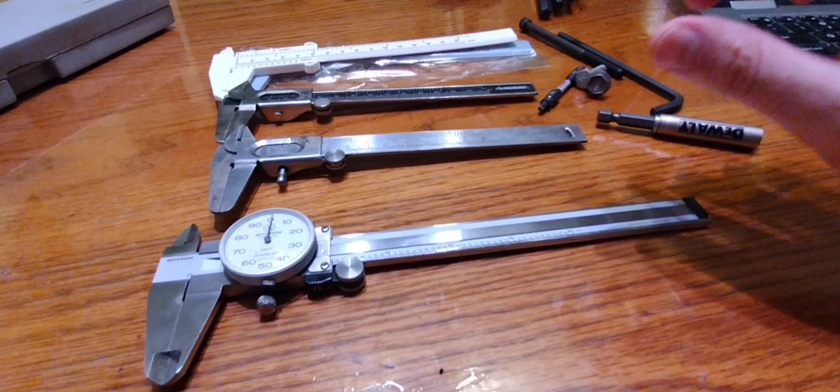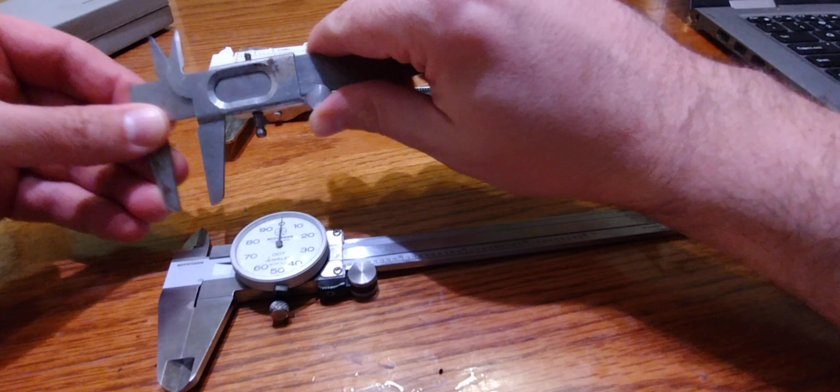So we've got several. I have no digital calipers. I have these Mitutoyo ones, which I don't know how much they'd cost new, but they cost me $50 used, bought from a widow of a machinist—obviously her husband's, who's the machinist. I mean, not that housewives of machinists couldn't have their own calipers. But anyway, this is an Empire one.

So these are all vernier scale ones, and I'll talk about these lines and what they mean. This is an Empire brand I bought at Home Depot. This is a Husky one, and I actually ended up liking this one a little better because it was more readable, even though I think this one might be made in America. And obviously this isn't the store brand, so it's a little better quality.

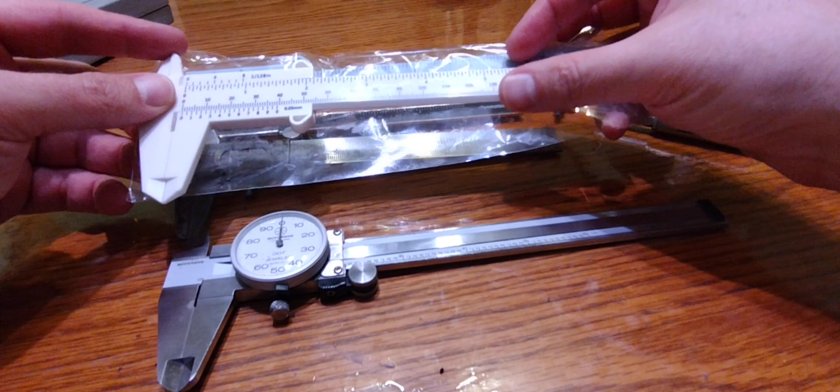I don't think much of that. And then I got these plastic ones. The story behind these is basically my wife, who's a physical therapist, a doctor of physical therapy, needed to do some kind of therapy that involved calipers, and she's like, 'Hey, do you have calipers?' Because that's like a thing you'd have—well, you've seen my YouTube channel, and she lives with me. I'm like, 'Do you need good ones or cheap ones?' And she's like, 'Oh, I need cheap ones.' Long story short, I said I'd just get her the plastic ones since they were going on human flesh. I went on Amazon to look for them, and when you get the plastic ones, they're so cheap you can't just buy one—you have to buy 10 or 7 or whatever, so I just got the big pack.

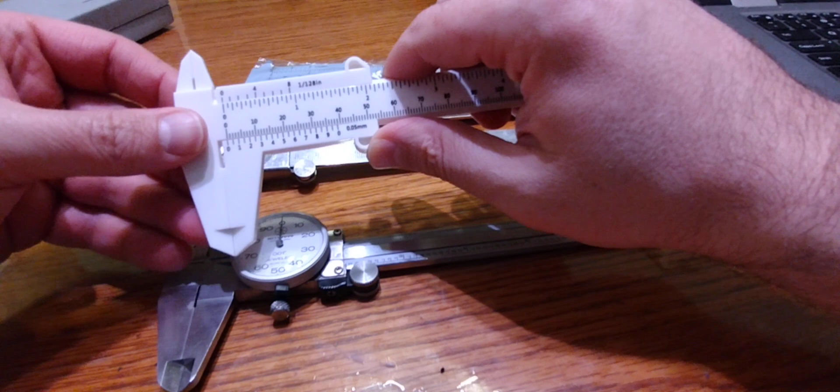So with all these calipers, one thing I was amazed about, and what I'm really going to talk about before I go into calibrating stuff, is that the main reason I got this one was that all these other calipers measure up to 1/128th of an inch, while this one goes to 1/1000th of an inch. But the main reason I got it was just because of this big dial, because I don't have the eyes anymore—I do not have the eyes to read a vernier scale.

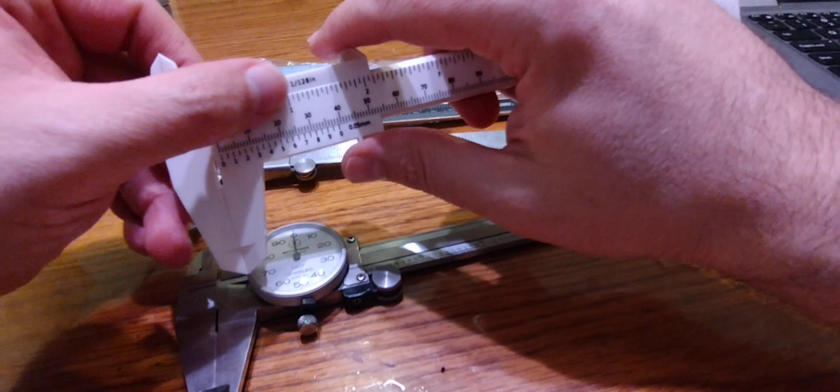But then I discovered when I got this one, maybe at first I thought it was just the contrast, but I can actually read all these lines here. And the thing with the vernier scale is, let's actually try to take a little measurement here so we can demonstrate this. Okay, I can actually read it through the camera too.

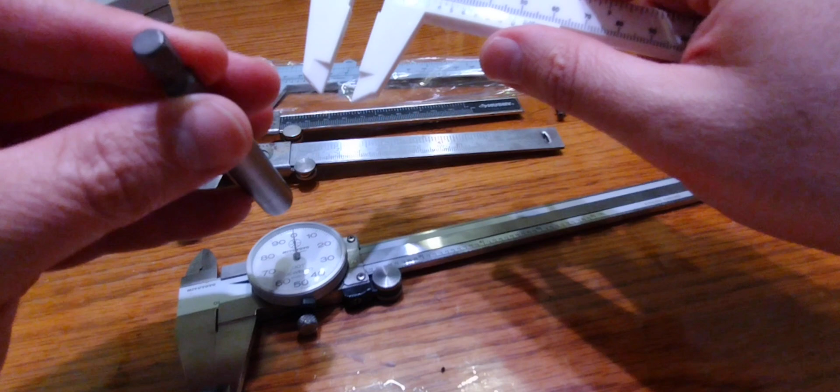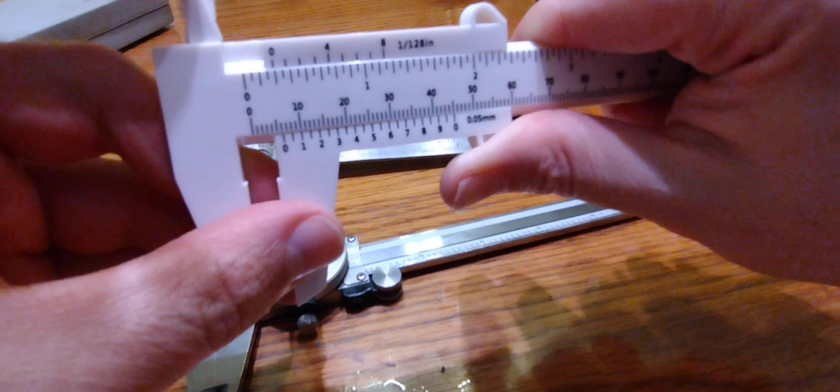Okay, so these are nominally quarter-inch hexagons—across the flats, these are nominally a quarter-inch. So let's take the measurement here in the middle. What you're supposed to do is see which of these lines actually lines up—we know it's a quarter-inch, but that zero doesn't perfectly line up with the quarter-inch mark. We have to see which of these lines actually lines up perfectly, and I think it's the 4. Those are in 128ths of an inch, so you add that many 128ths to it.

Right, so let's see—I'm going to say 4 or 5. No, I'm going to say 5 is close. No, I'm going to say 6. Yeah, I'm going to actually say 6. Okay, so 6/128ths is spot on.

Okay, so that's 1/4 plus 6/128ths. Let me use the scientific calculator. 1 divided by 4 plus 6 divided by 128 equals 0.297, so 0.296875. Okay, let's check this with the better instrument.

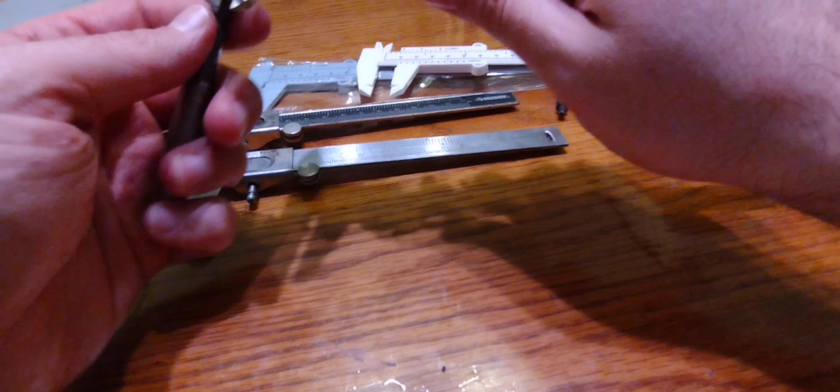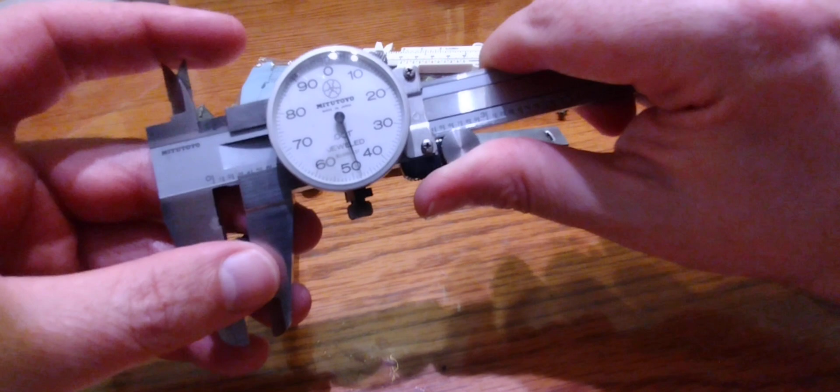Now, I don't have the means to calibrate these or test these with gauge blocks or a standard calibration standard, which you'd use for a micrometer that goes down to hundred-thousandths or mils. Okay, anyway, so this is...

0.247. This is 0.247. So 0.247. Okay, I don't know how accurate that is. Anyway, we're going to do some more—let's figure this one out. So we said that's 247.

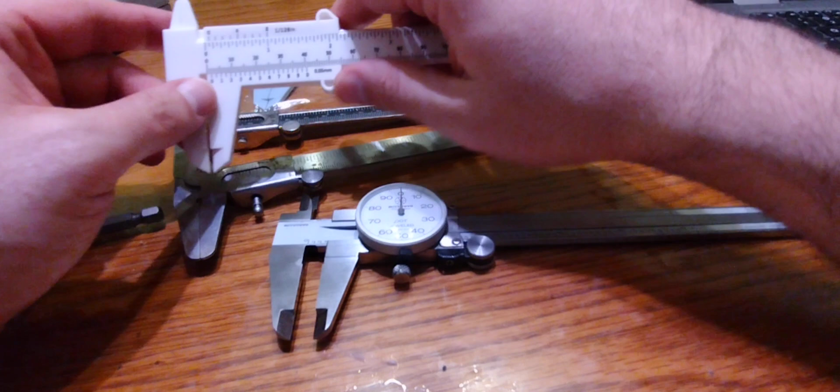1 divided by 4 plus, I'm going to just say 4 divided by 128 equals 0.28. So I'm going to say maybe these are not the most accurate. But here's the thing—maybe they're not super accurate, and actually I'll say they don't touch zero perfectly. They're about level.

But here's the thing about these—maybe these aren't down to the 1/128th of an inch. Let's go take this measurement again. Okay, so 1/4... yeah, no, this is on the 6, yeah, 1/4... 1/4 plus 6/128ths equals 0.29, so that would be 0.296875.

In theory, that should be much wider than this. So I'm wondering if there's a little flexion on these. But anyway, maybe these aren't super accurate.

But here's what I like about these, and that's why I might actually buy a metal caliper pair. I realized the reason I could read them, and I'm over-exaggerating, is I don't need to use my calipers to measure my calipers here.

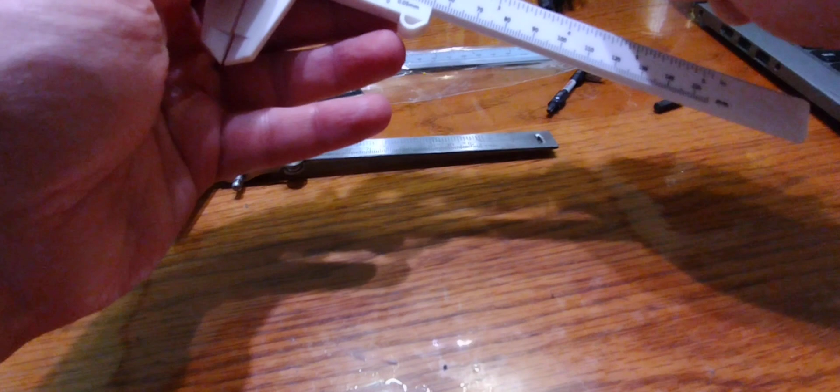Basically, as you can see, this is not the full vernier.

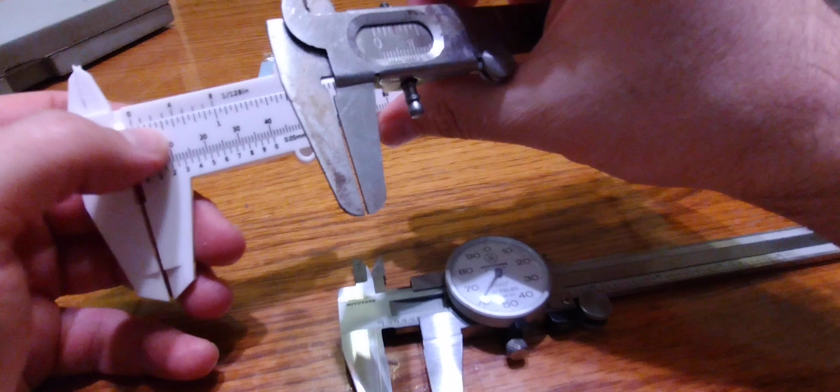So basically these vernier scales, and I should have looked this up before the video, but I'm sure there was a Dr. Vernier or a mathematician by that name who figured out some crazy ratio. These numbers up top are at an offset, and that's why you can line one up to this, and that's how you get from one, even though this only goes up to 16ths.

You can do the similar thing with millimeters on this. This goes to 0.05 millimeters, and you can do the same thing down here, which is actually probably a little harder to read, but same principle. So that's one cool thing, and that's an advantage of this.

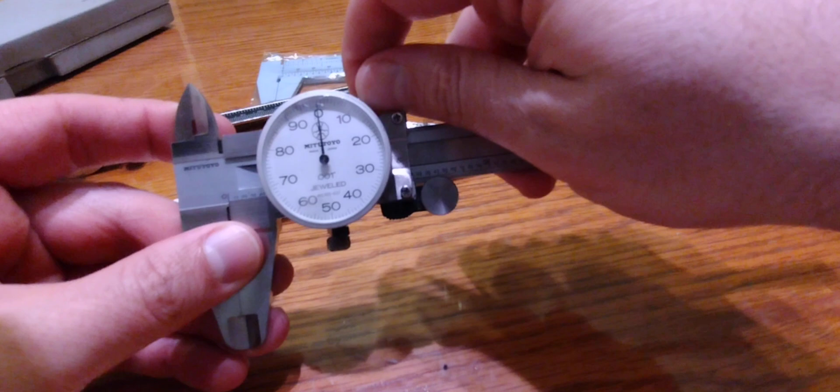So these dial calipers, you can get digital calipers, but obviously you can read in both forms easily, just a push of a button, because it's like a computer in there. A dial caliper could never do that. I guess you could have both numbers inside, but then you'd have two numbers in the dial, and it would be a pain with accuracy there. So it's just never going to really do that.

So that's one disadvantage. But the advantage of the dial caliper, in addition to going up to thousandths of an inch regardless of quality, is that I don't think most of the time you need that, unless you're a machinist. But you can get vernier scales that go to a thousandth of an inch.

You can get that. Let's see what 1 divided by 128 is. What is 1/128? It equals 0.007, so that's 7/1000 of an inch. So if I could get one more tick on this, I could go to 256, which I could probably do on a vernier scale that long.

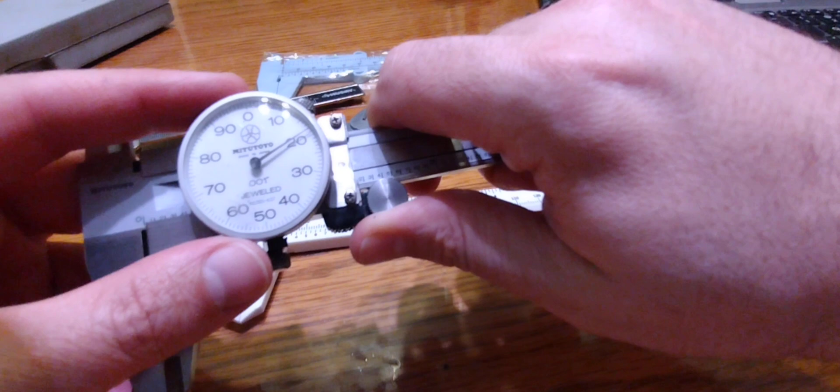So obviously you can get one that goes to thousandths, but these are just easier to read, easier on the eye. Also, I think with this gear there's just a little more friction to lock down, because there are gears in here and sometimes they skip a tooth. You'll notice they skip a tooth, and then the zero ends up shifted over here, so you'll have to go recalibrate that.

And there's other things to do here, like you're supposed to clean this off, clean that off, to do that.

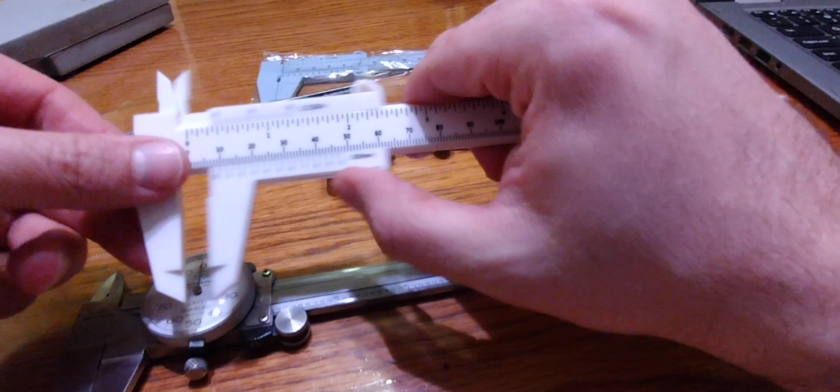But now I kind of want to get a metal set of these. Maybe I'll get one with this style where it's not super small like this vernier scale, where it's more like a 12-inch set, because I realize I can actually read this vernier scale here, and that's useful and handy. Maybe at that point I'll also look for a cheap pair of gauge blocks so I can calibrate these, because I'm insane, I don't need that. But I want to be the guy that has the gauge blocks and the standards, the calibrated scale. That's the person I want to be, and I'm going to live that dream.

But yeah, anyway, so these are, I guess, not the greatest. Let's keep on keeping on. So this should be 9/16, right?

So that would be 8/16, 9/16, but it's not quite 9/16, it's actually a little under. Oh wait a second, this was under, right? Let's go back and take that measurement again. So we said that was under a 1/4 inch, and it's actually closer to 6. So that would kind of make sense, right?

So let's assume this was actually 3/16. Let's do 3/16 plus 6 divided by 128. And that equals 0.234. Let's do that one over here.

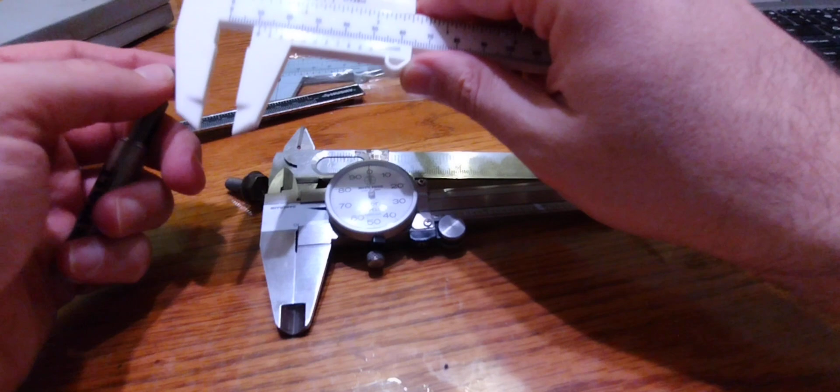Which is fine. Another good thing about these calipers is sometimes you want that 1/16 inch accuracy. Like when I'm measuring bolts and stuff, I really just want 1/16 inch accuracy.

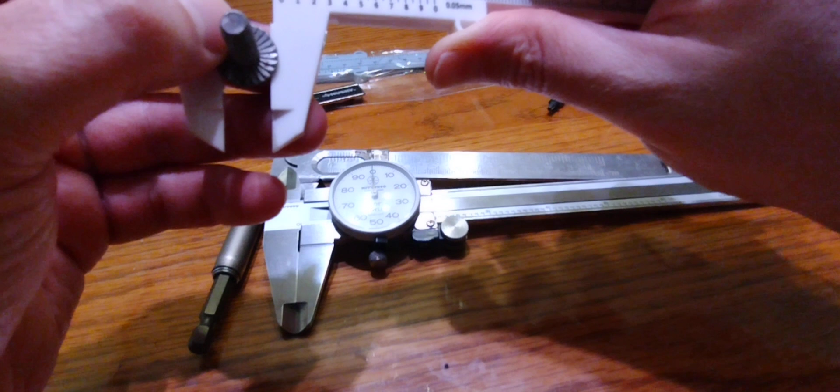But anyway, this should be like 9/16, right? But it's a little under 9/16. I'm actually going to go with 5 being on the money. So 9/16, I'm actually going to go with 0.5 plus 5 divided by 128. This isn't a scientific calculator. 0.539. Okay, 0.539. Let's just take some more measurements here.

And this is actually saying... 0.4, no, 0.43, so that's saying 0.433. That's saying, that's being weird, trying to look through the camera. Maybe they're just super inaccurate. I mean, they're definitely right.

Let's go here, right? Did I say 3/16? Wait a second. Oh, I said 0.5, yeah. What did that read? 436.

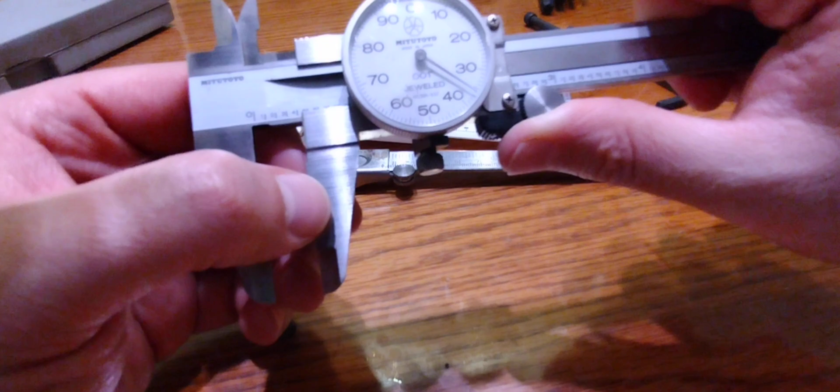Okay, so let's do this again. So that's 7/16, not 9/16. I don't know what I was thinking, I was not thinking. 5/16, so 6/16. Okay, so 6/16 plus 5. Okay, 6 divided by 16 plus 5 divided by 128. Once again, we are in science.

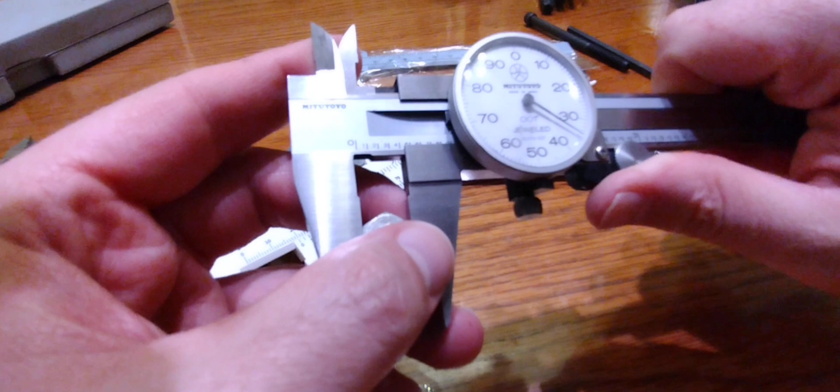0.414. Okay. Point 404, right? 404. So that's 404.

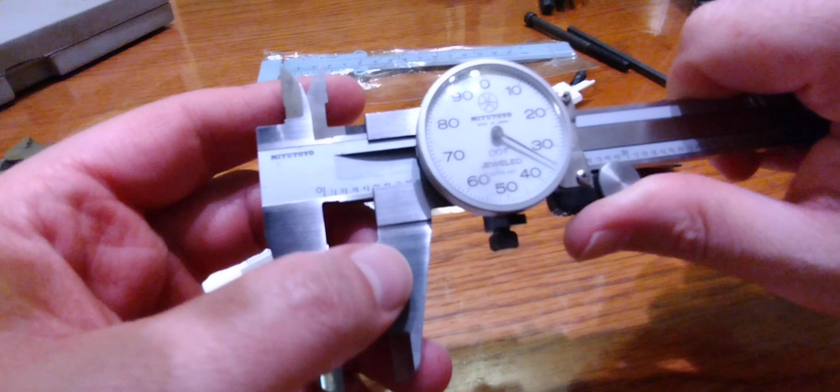Yeah, so I guess the accuracy in that is absolute crap, but on these plastic ones - so what we learned is the accuracy in these things is absolute crap. But I like this, I like this design, and that's fine. This is fine, and obviously my wife's measuring human anatomy, she's not doing microsurgery, so that's fine for what she's doing.

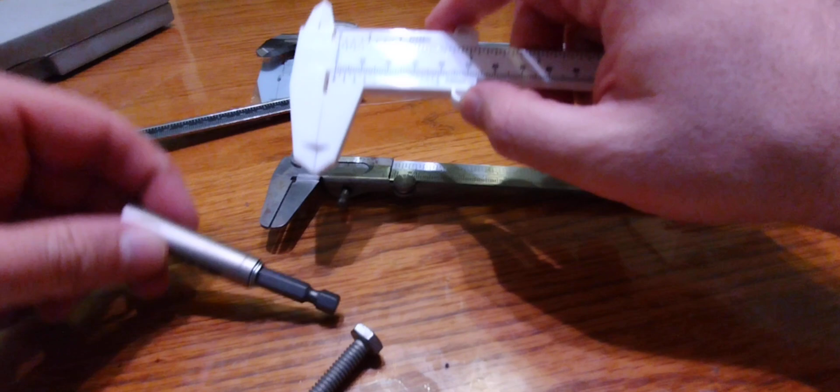And this is actually fine for measuring bolts, right? There's something advantageous to measuring like this, if you want to sort bolts quickly, this is actually really useful, because we know it's accurate to the 1/16 of an inch. I would get the metal one, but the advantage of this is you don't want to get confused by all the extra precision, because you want the 1/16 intervals, right? Maybe even if you had drill bits, you're going to 1/64.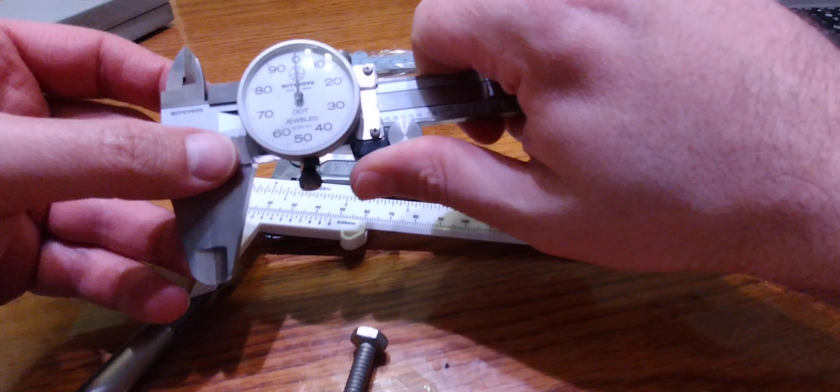The main thing I actually find this really good at is when I'm trying to measure bolts, I don't know if it's metric or imperial, because I can easily convert this so accurately, I can convert to centimeters and they're pretty accurate. And I can look at holes and stuff, and this is probably good enough where if I knew the standard acceptable variance in a drill bit or a bolt for the outer diameter, inner diameter or something, I could measure them and do that.